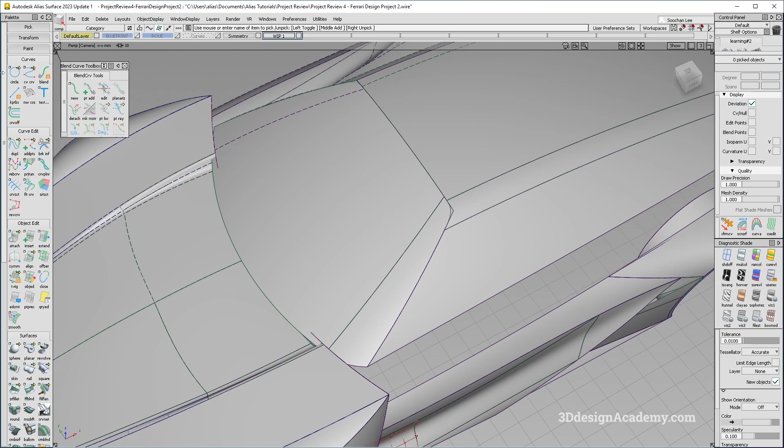In this lesson, we will continue with part 2 of the Ferrari design project review. So in the previous lesson, I spent some time fixing up the upper, so I think I'm going to go ahead and move on to different areas of the car, especially the body side and the front fender.

So before I do anything though, let me just go ahead and turn the symmetry off over here, and I'm also going to just trim this out just because it's bothering me over here. So let's go ahead and do that. I'm just going to project over here like this, and trim it like that. And since I'm done with it, I'm just going to go ahead and delete the construction history over here.

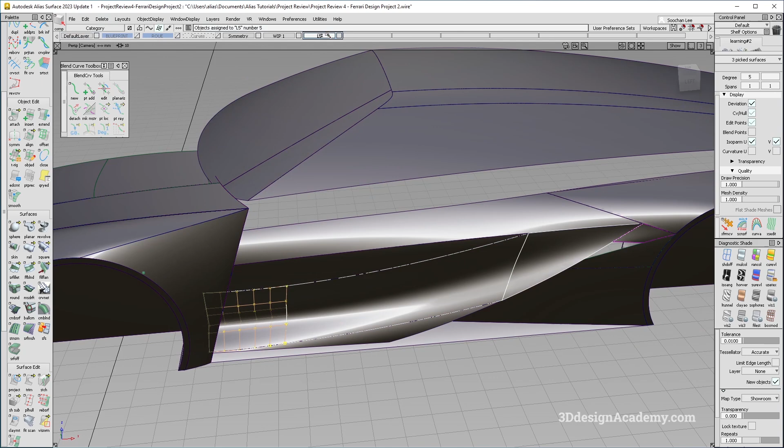And let's look at this fillet over here. So I did turn on the CV structure. Now the highlight in the structure is actually not too bad. However, the CV structure can use a little bit of improvement. As you can see over here, it's going like this. So first of all, I'm going to delete the construction history over here, and I'm just going to go ahead and hide this. So I'm just going to say hide, and let's look at the underlying structure.

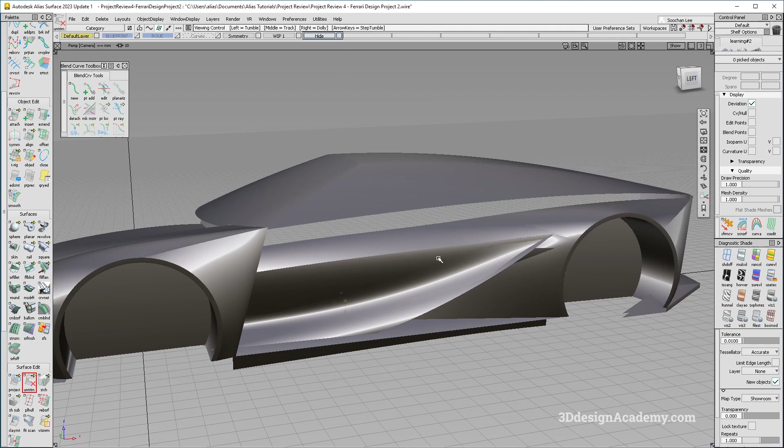So I'm just going to go ahead and trim over here, and trim this one. Actually, the theoretical looks pretty good. Now, if the theoretical is good, the surface created for that is also going to be good. As you can see over here, the theoretical line flows nicely. Even though the CV structure of the fillet is not exactly ideal, I think it's actually doing pretty well. All right, let's go ahead and fix it up a little bit so that the surface or the fillet itself is a little bit better.

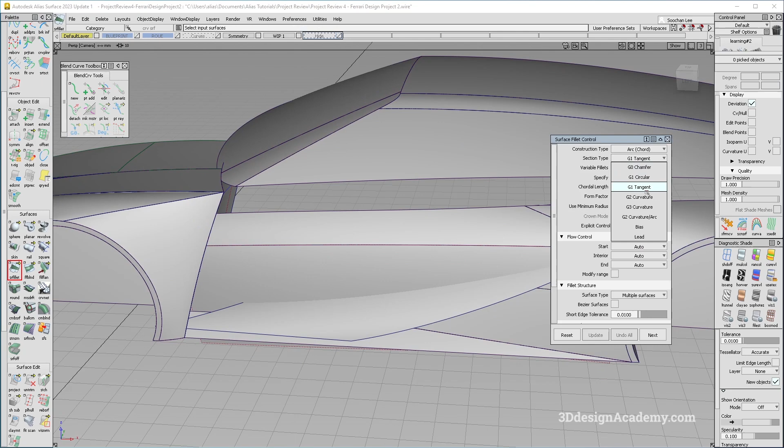So I'm just going to delete all the COSs that were previously there. And I'm just going to go ahead and do a surface fillet. It's going to chord, it's going to G2. I can't quite remember what size this was. Now this is actually really small. It would have been nice if the model was made in full size, because right now this is, I think, probably like 1/10 of what it's supposed to be, but that's okay.

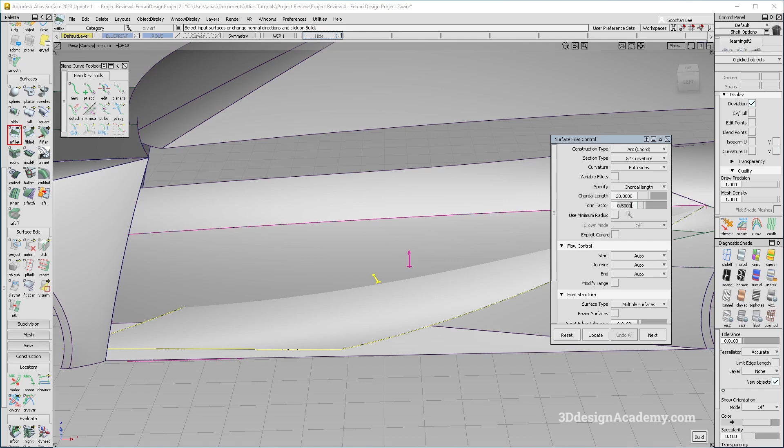Alright, so it looks like it's about 20 mils there, so let me just go ahead and hide those, and I'm just going to grab a surface fillet over here, and let's do 20, and see how that does. I'm just going to make sure that the direction of the fillet is good, auto is good. Now, that said, it looks like even with the surface fillet, it does have a little bit of a structure issue. It's not horrible, it's a little bit better than before, but it's not exactly great.

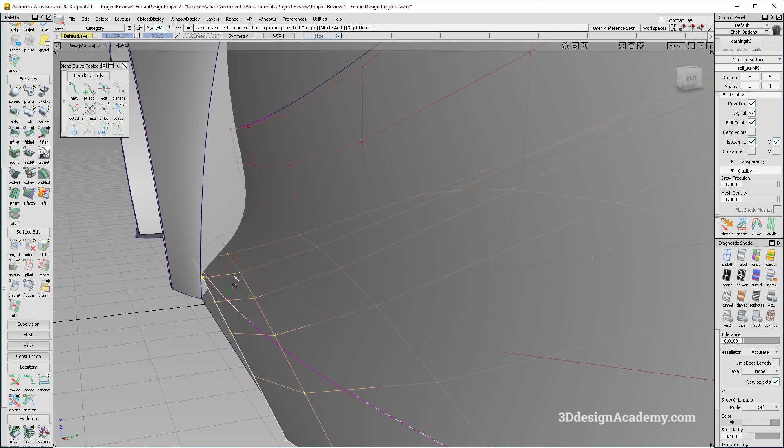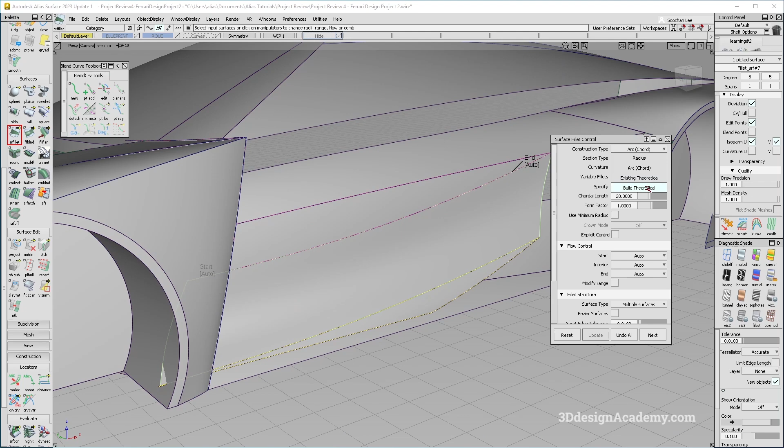Now, one of the reasons why this is doing that is because, as you can see over here, this surface has a lot of curvature. So let me just undo this. As you can see, it's got a lot of volume. So that's automatically going to curl the surface inboard quite a bit. All right. Now, let me see if I can create it using other options. Instead of using G2 chord, I'm going to see if I can just do a build theoretical and see if that makes it any better.

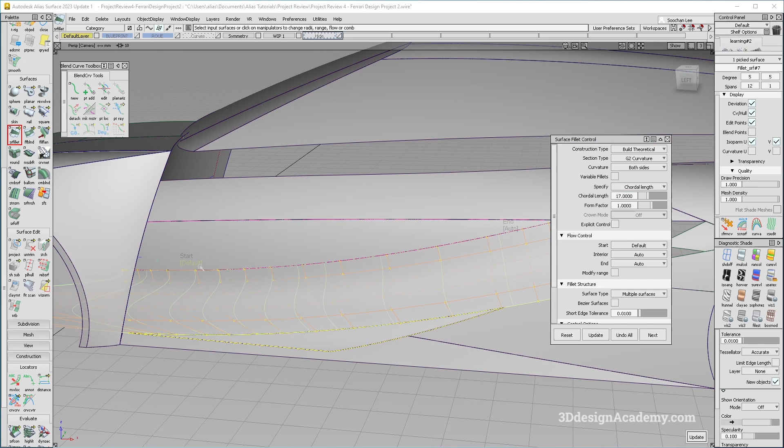I think the CV structure on this one is a little bit better. However, because it is actually going over, you probably want to reduce the size a little bit. So let's go ahead and do that. I'm just going to make it maybe 17. I probably want to retain a little bit of the surface under there, so I'm just going to say default over here for now, like this, and let's leave that to auto.

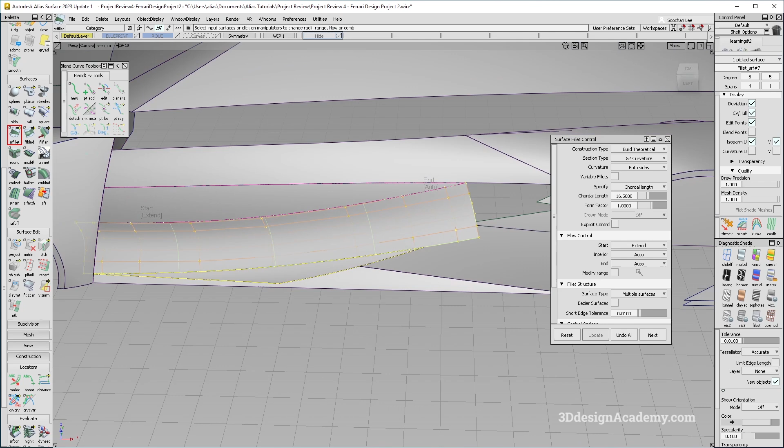Okay, so it looks like it's missing a little bit, so I'm just going to say extend, and I'm just going to reduce it by one more, so let's do 16 like this, maybe a little bit more, 16.5. Okay, so that's a little bit better. As you can see, it's a multi-span surface. So I'm going to see if I can just do a Bezier.

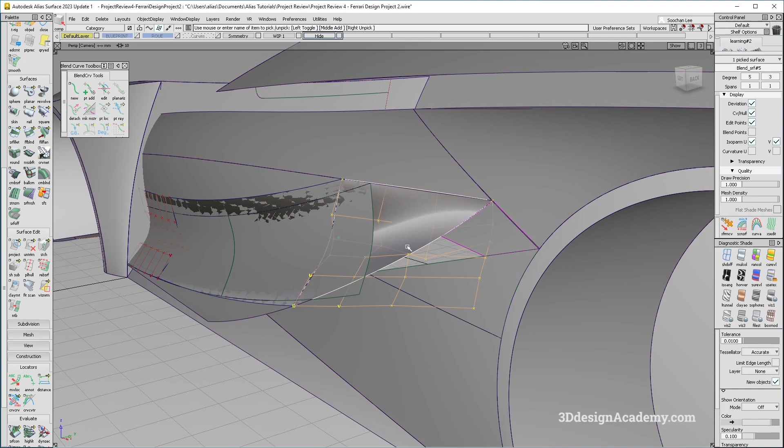Bezier, it's not bad, but it's not exactly great. Now, the creator of this model did have a surface going all the way through. Actually, let me just see this. Now, if you have a surface like this, you don't want to terminate it like this over here, because the surface CV structure is a little bit weird. So I'm going to show you guys how to patch this in.

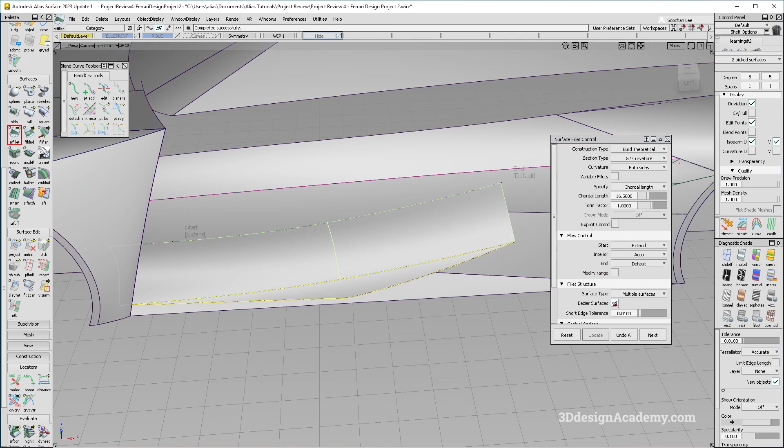Now, instead of having a multi-span surface, I'm going to see if I can just turn Bezier off and do default, and well, still multi-span surface, so let's try to reduce that. Actually, you know what? Let's do Bezier on this one. Still splits into two, which is kind of annoying, but that's okay. All right, so I'm going to try and clean this up. So I'm just going to use align over here like this. Oh, maybe I shouldn't have done that, but that's okay.

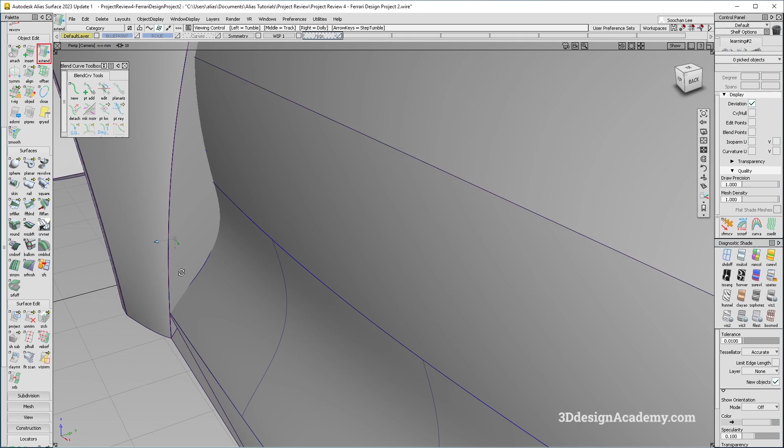Sorry. Okay, so first thing I'm going to do is stretch this back over here because technically this part is blocked in, so you don't really need surface all the way there. So if your footprint is limited from here to here, that is going to allow you to reduce the number of spans. So I'm just going to go ahead and align this one. Position influence, I'm going to crank it up to max. I'm just going to leave it like that.

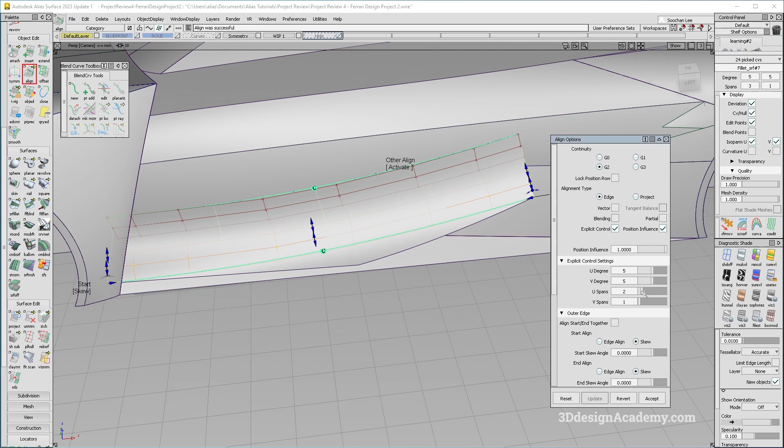I'm going to do the same thing over here. And looks like the CV structure is following somewhat nicely. And I'm just going to reduce the spans like this. And as you can see, I was able to achieve curvature with a single span. Now this one over here, I am going to say partial because I don't want the CV structure to go all the way through there, which is going to be a little bit weird. Yeah, that's actually not too bad.

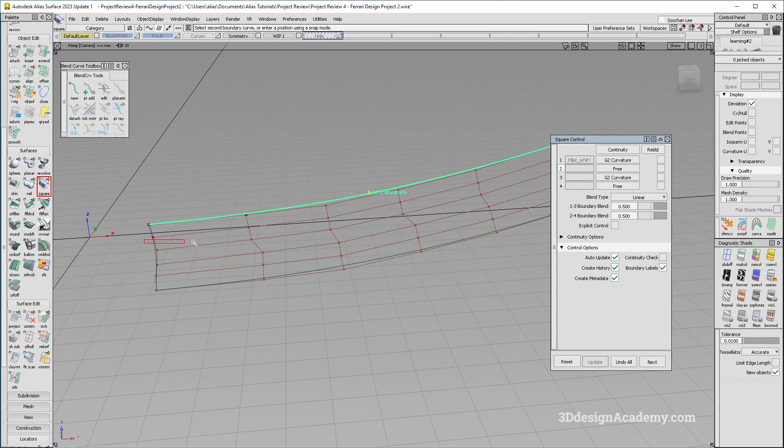Right now you'll see that there's a zigzag, so I'm just going to clean that up using square. So I'm going to grab square: 1 is going to be curvature, 3 is going to be curvature, and I'm going to pick the exact same surface in order to clean that up. And as you can see, that gives me a nice CV structure, which is much better than before.

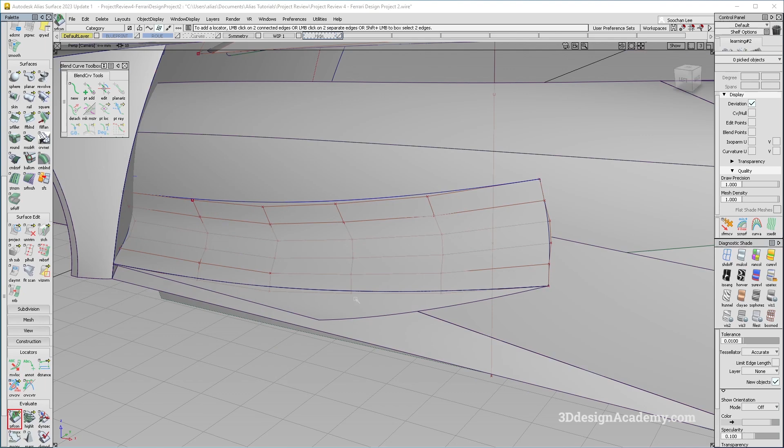And because I'm aligning curvature to the existing fillet, it's going to achieve curvature onto the surface that it was connecting to. So if I grab surface continuity over here, it's still curvature here and still curvature here. Okay, so now comes the question of how do I block this in? So I'm just going to untrim this piece over here, and I'm going to go ahead and do this.

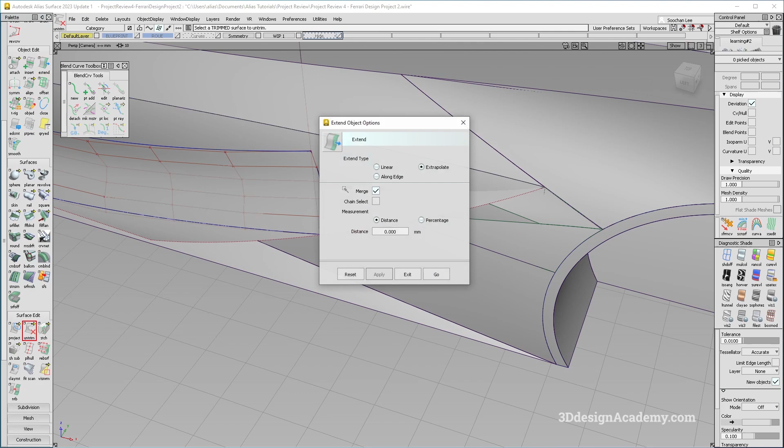Now, when you're tackling an area like this, there are a couple of options. If you want to reduce the patch count, you can probably just extend this over here and have this patched in like this. However, because this is ending in a triangle, you can try to patch this in one go. I guess the most natural patch of surface is just to have something like this and trim both ends. But if you have a design edge that you want to retain as much as possible, I'll show you how to do that.

Okay. So I'm just going to extend this COS over here like this. And as you can see, we got 4 edges: 1, 2, 3, and 4. So now you can use a square to fill that in. So 1 over here, 2 over here, 3 here, and 4 here. Now, right now my continuity is a little bit off, so I'm just going to turn that off.

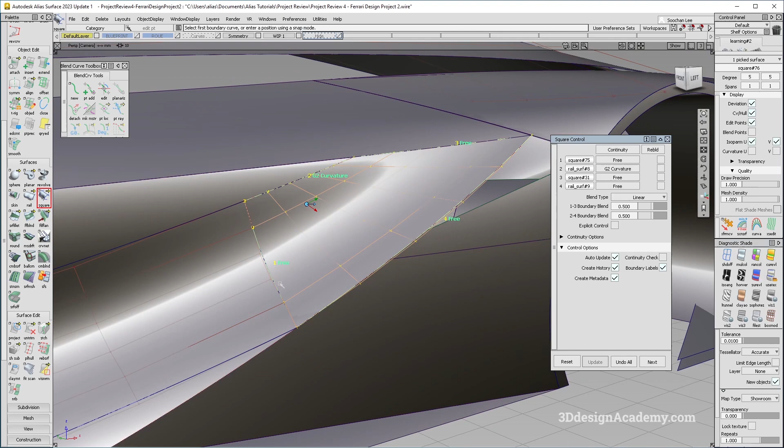And I'm going to set it to curvature, because it does have to be smooth since it's essentially a continuation of the fillet. And this side has to be curvature too. So 1 is going to be curvature, but it's got a lot of spans. So I'm going to turn on explicit control, and it's going to be 5 and 5. Okay, let's take a look at this. I'm just going to do 1 over here, and it does look like a pretty decent effect over here.

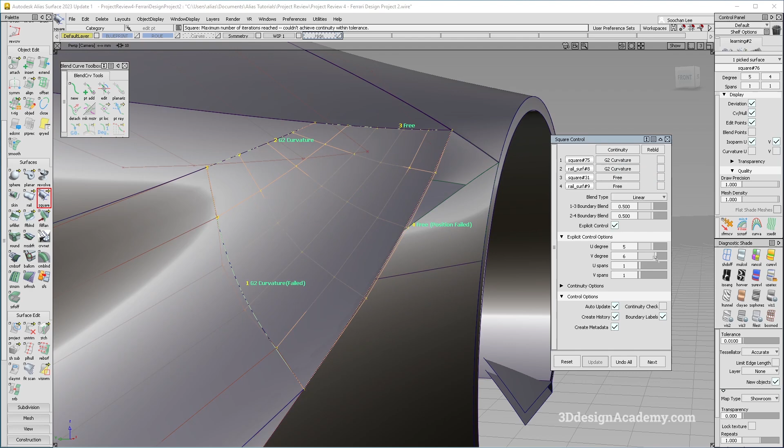So what I'm going to do is I'm going to reduce the number of CVs over here. And the reason why I'm doing that is because this is a position row, this is a tangent row, and this is a curvature row, which means that these rows of CVs are affected by the continuity over here. Same thing over here. This one is position, tangent, and curvature.

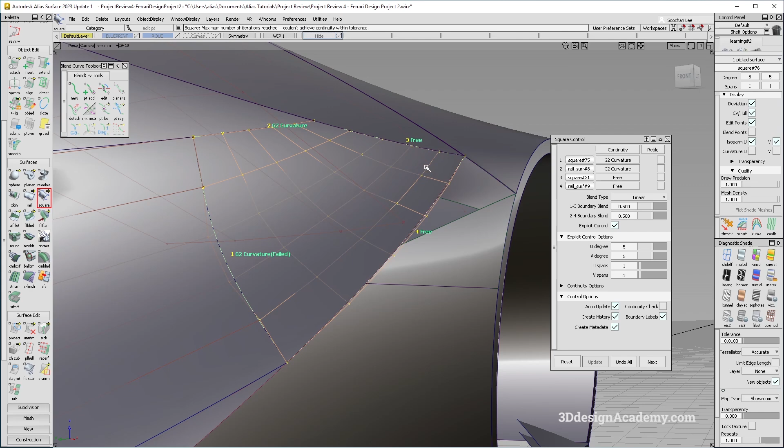Now, if you look at these 4 CVs, they absolutely have no effect on any of the surfaces, which means that they're just free floating. So you have to control them also, because as you can see over here, it's doing a little dip over here. If I were to just turn this off, it's nice and natural. But if I were to do curvature on this one, you'll see that this goes up a little bit. So now, the highlight is actually pretty decent, so you can probably leave it like that.

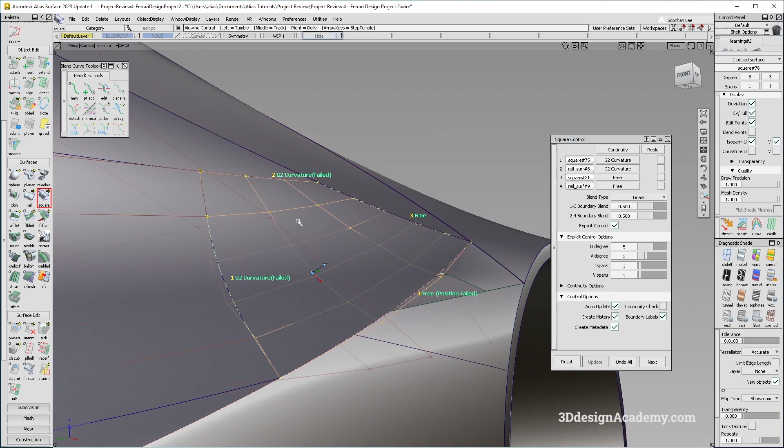But if you wanted a little bit more CV control, here's what I suggest. If you want to leave it at degree 5, I do suggest playing around with the boundary blend, depending on which side. Well, it doesn't look like it's doing much. One other thing you can do is you can also reduce the number of degrees like this. And what this does is it limits the number of CVs that are free floating. As you can see, there is no CVs that's not affected by some kind of continuity.

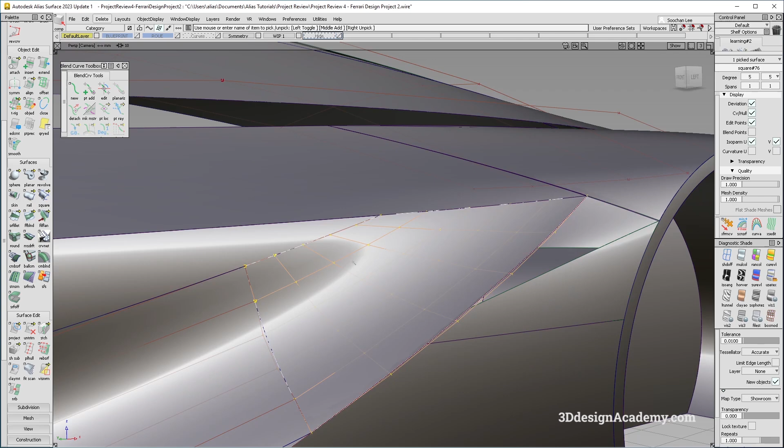The only problem is, of course, because it is degree 3, it's failing position here, failing curvature here, and failing curvature here. Now, if this was the case, what you can do is just leave it like this and delete the construction history and crank it back up to degree 5. And what that does is it actually has a really nice linear CV structure flowing all the way through and refit all the continuity after the fact.

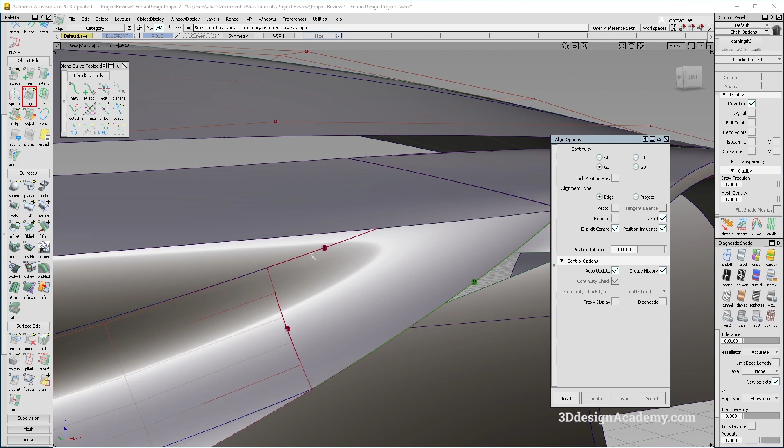So right now it looks like it's failing. Oh, actually that's tangent. So it looks like it's failing tangency over here. It's probably failing position over here. So let's go ahead and fix that. So first of all, I'm just going to fix position over here like that. Looks like not a lot of CV movement, which is good. And let's go ahead and make sure that this is curvature like that. That's good. And I'm going to go ahead and see if I can get curvature here.

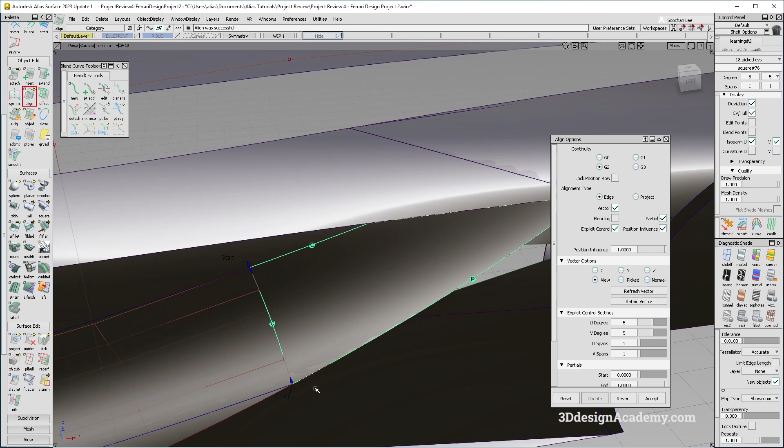Now this one is going to be a little bit difficult. So let's see. Now, of course, if I do edge, it's going to go like this, which means it's failing position here and failing position here. Although I'm not sure why it's failing position here, but that's okay. So what I'm going to do is instead, I'm going to use the vector like this. Oh, and what do you know? I got curvature on both sides. And that's wonderful.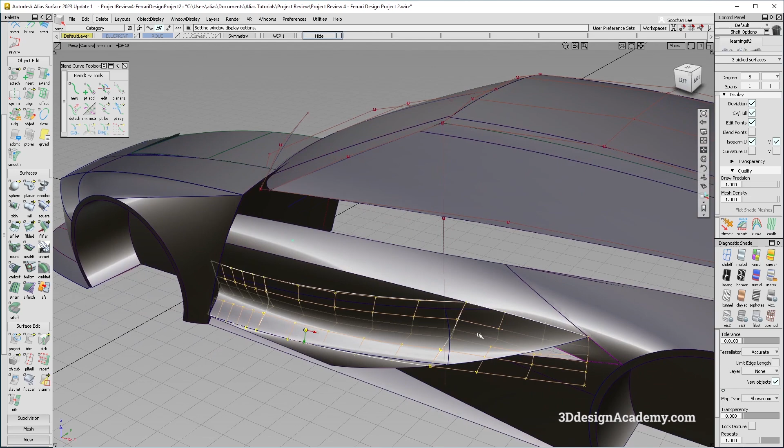All right, so I'm going to go ahead and delete the construction history over here, much cleaner than before. So let's just go ahead and trim this one over here. Oh, actually, I believe this is already trimmed. Okay, so if you look at the before, not only did I reduce the patch count, the CV structure is a lot better, and I don't have a weird twisting surface over here. So let me just go take a look at this. It's much more controlled. It retains the edge, highlights very nicely, and that's how you improve the body side. Okay, so now that's done.

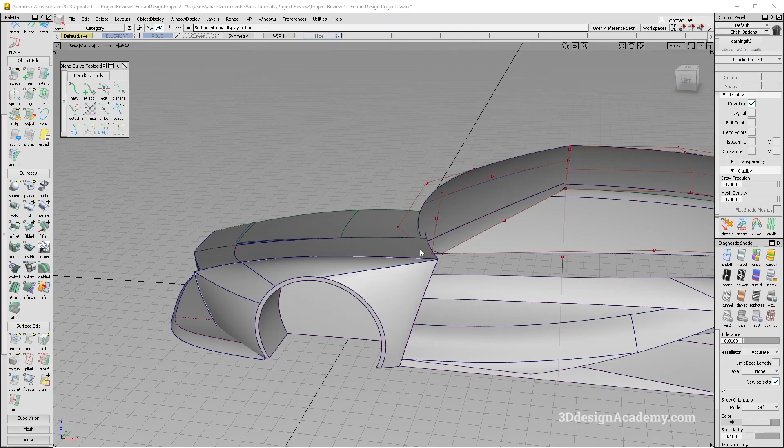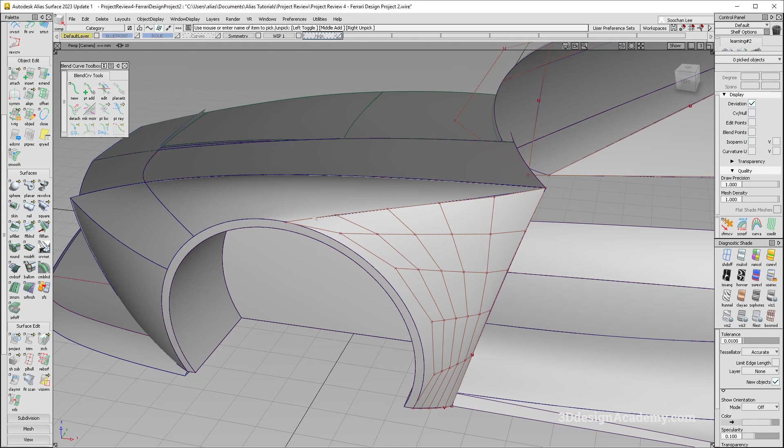Now, one of the things that you probably want to do is if you have a fender piece like this, you probably don't want to have a sharp edge like this. That usually creates a little bit of CV structure problem, and it's not exactly the best when you're trying to fillet it. So unless you have a specific design line that's going like this, I suggest trying to open it up a little bit. So let me go ahead and do that. Now, another thing I'm going to do is if you look at the CV structure over here, you'll see that there's a little bit of volume here. So it's creating a little bit of bump on the CV structure.

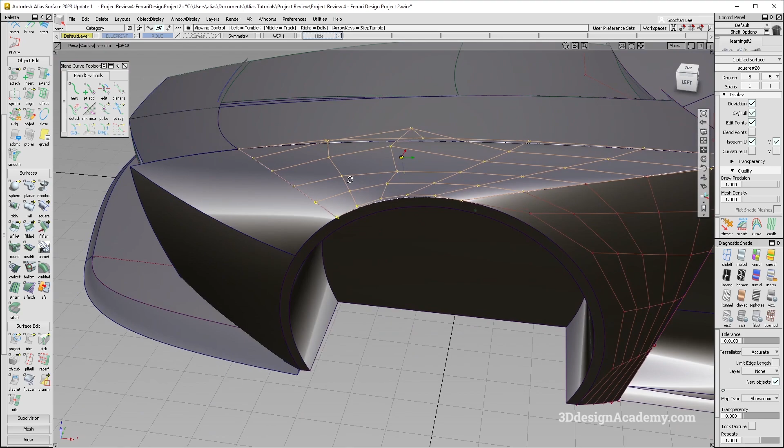Now, highlight's not bad, but when it comes to surfacing, this is probably not the best practice. So I'm going to fix it a little bit. But before I do that, I don't see any reason why this is divided into two pieces. I think the reason is because the creator of this model tried to curvature align on this side, which is fine. But I believe I can do a little bit better and just make it out of one.

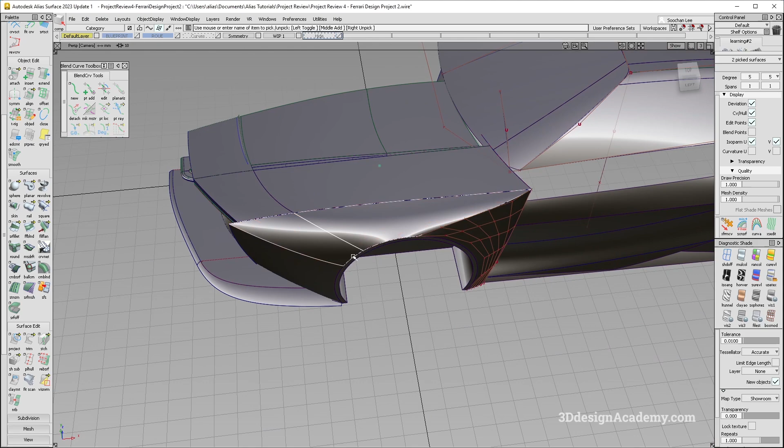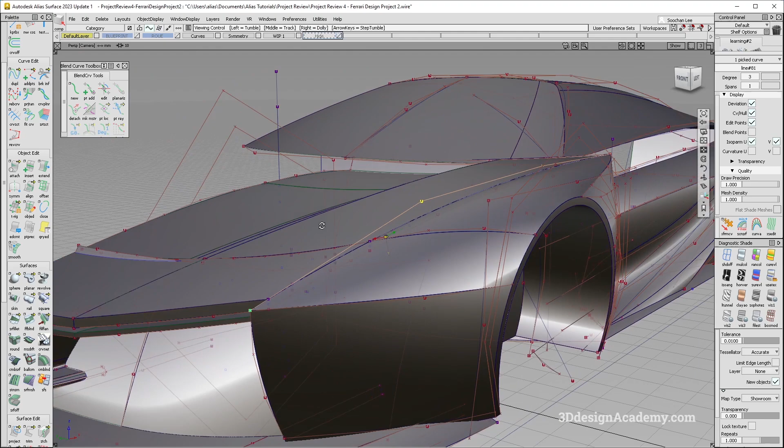So let's do this. I'm just going to snap a curve over here, or actually duplicate it. Let's see, I don't know why there's a, oh, there we go. Actually, if there's one surface there, I don't know why. Okay, so you know what? I'm just going to dig through the curves. So he did have one curve. Yeah, so why don't we just use that?

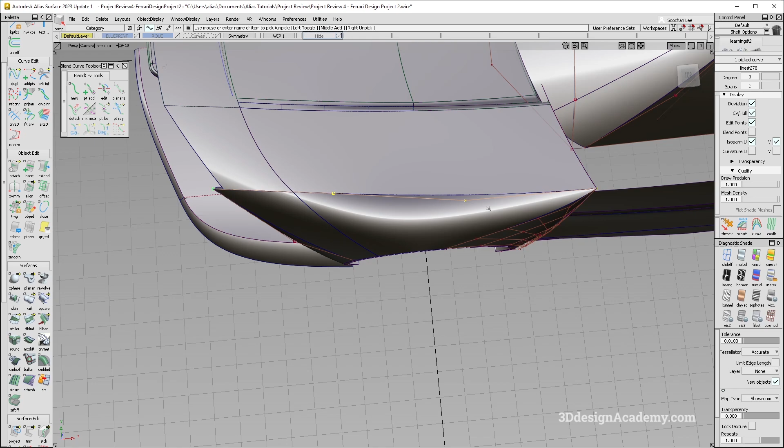Okay, so I'm just going to copy and paste and bring it over to the default layer, hide everything else. So if you have one curve, I suggest you use it. Now, I would say this is probably not best practice. So what I'm going to do is I'm just going to make it degree 2. Now, there is going to be a little bit of discrepancy. I say that's totally fine too.

Okay, so I'm just going to hide these over here. And actually, I'm going to hide this one also. But before I do that, let me just get a curve. Let's see, degree 3, yep. And I'm just going to put it over here. I'm just going to duplicate this one over here. You know what? Actually, let's make it degree 2 like this. I think that's good. And of course, I do need a volume here, but let's see. I'm going to just use a birail first and see how that does.

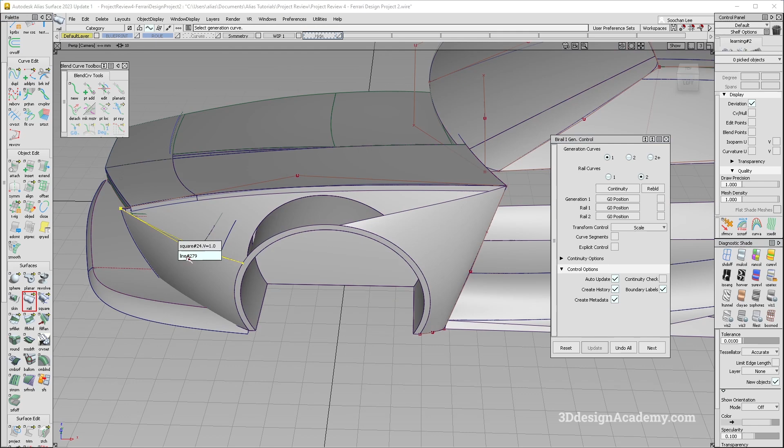Okay, so it's going to be 1, 2, and 3 over here. And I really don't know why, but Autodesk really has to fix this. You'll see that the surface just ends over here, and you have to click rebuild so that it goes all the way through. It's not kind of annoying, it's actually really annoying.

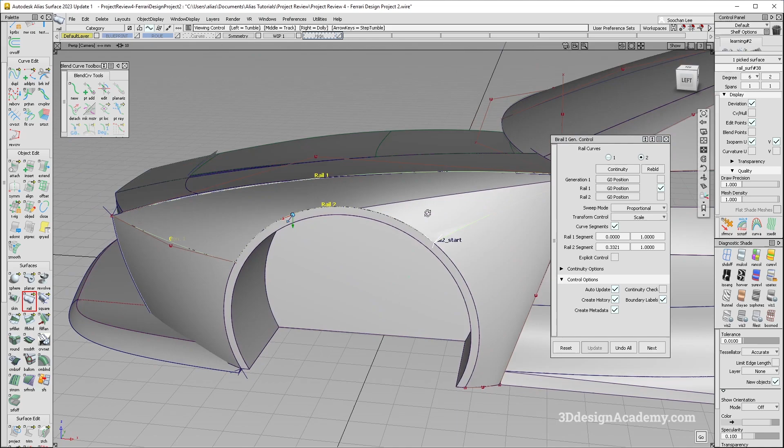Alright, so I'm just going to turn curve segments on like this, and I'm just going to put it over here. Right away, actually the CV structure is not that great. To be honest, I don't know why it's doing this, because I feel like it should be a lot more consistent, but that's okay. I'll try to fix that. But as you can see, actually, I do think it's a little bit too flat. That probably is what the design calls for, but let's take a look at the picture.

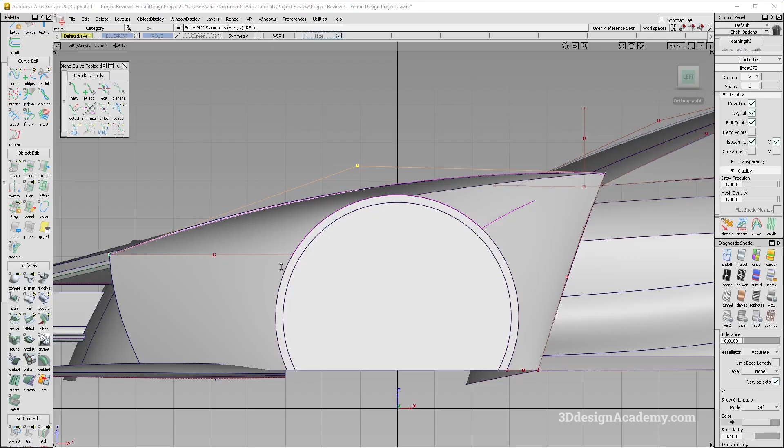As you can see over here, I know that the rear 3/4 view and the side view make it really slim, but if you look at the front 3/4 view, it's actually rising up a little bit, which is probably the volume that the designer of this original sketch intended. So if that was the case, I would actually raise it up a little bit. I don't think it's going to detract from the design and the model. So I'm just going to do that and give it a little volume. And while the CV structure is still a little bit wonky, I do think that the volume over here is actually not too bad.

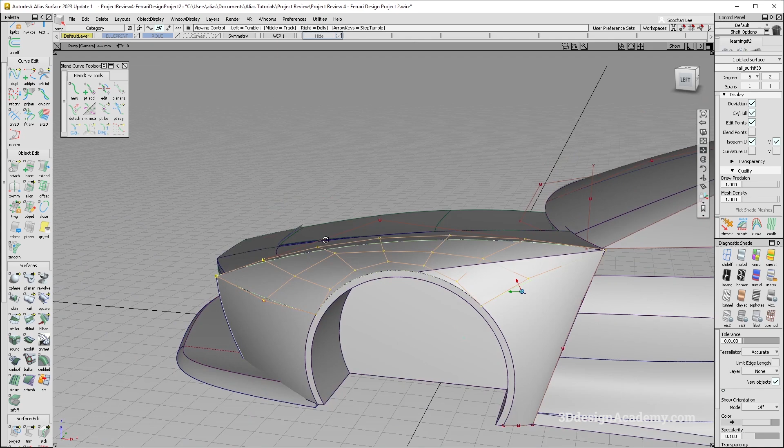So what I'm going to do is I'm just going to duplicate this edge over here, like this. I'm going to get rid of this one. And let's just rebuild it using a square. So it's going to be 1, 2, 3, and 4, like this. And of course, I do want this to be degree 5. This one, on the other hand, I think I can reduce it.

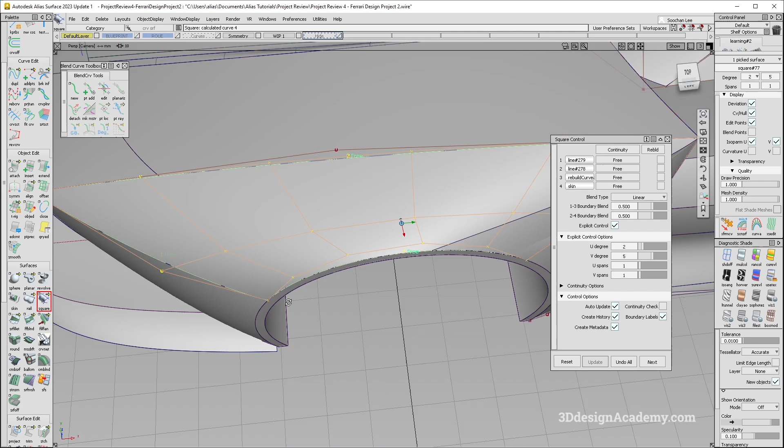Now, this one, I don't know if it's because it's a square, but it looks like it's a little bit biased towards the outboard side. So what you can probably do is just use the boundary blend. Maybe not. That's really weird. Well, if that's the case, you can always slide it over here. So let me just slide this CV over here. Actually, let's take a look at the volume as well. So I'm just going to bring this one over here.

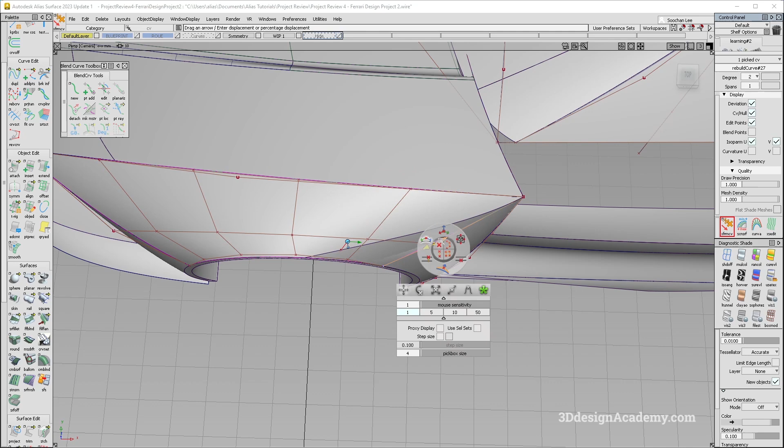Slide it onto this side, and I'm going to slide this onto this side like this so that the CV structure is a little bit more even. Now this does mean you have to realign all of these, but as you can see, you get a more balanced CV structure, which you probably want to achieve when you're modeling.

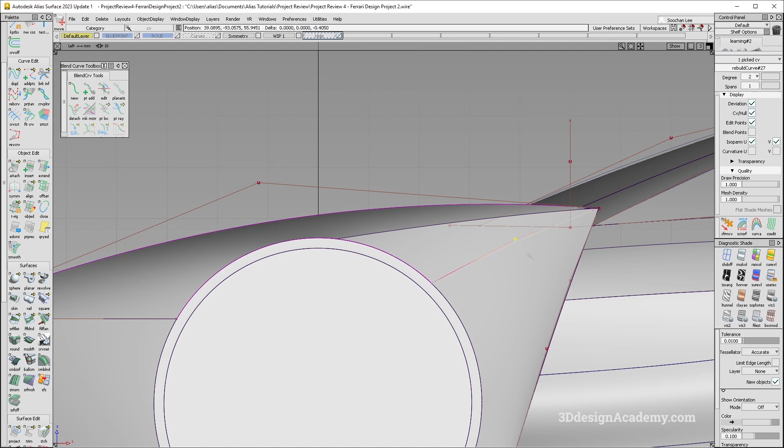Okay, now I'm just going to zoom in over here. Let me just turn this off, and I'm just going to bring it down. Oops. Let's grab the CV like this. Actually, that brought down the volume quite a bit, so maybe that's not the best. Okay, well, let me just go ahead and hide it. You know what? Let's just retain it like this.

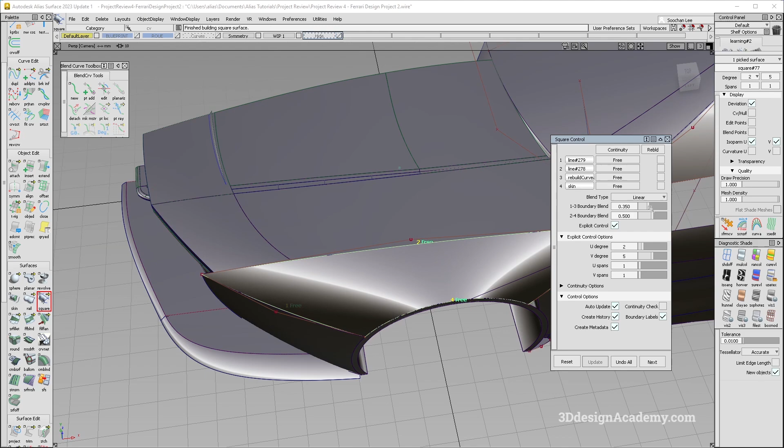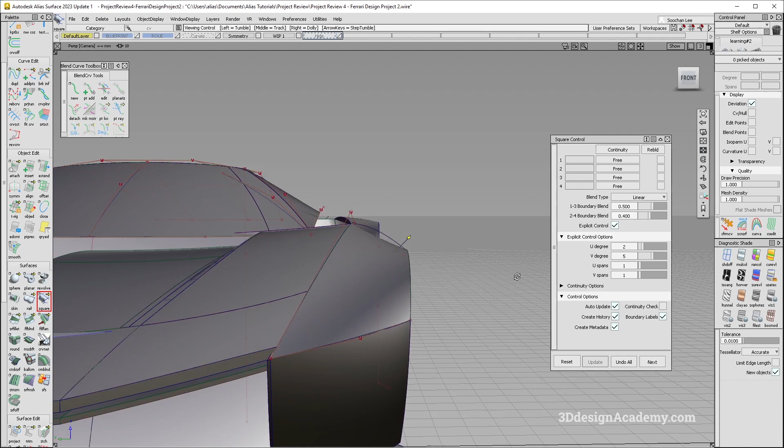However, if you want a straight edge, what you can do is you can just bring it down like that and use a boundary blend. Let's actually turn up the CV structure. Or you can just manually increase the volume. Maybe something like that. Now it does turn into degree 5, which is fine. I don't know why Square automatically does that, even with the explicit control, but it does what it does. So yeah, I think that's much better. I think having a little volume towards the inboard side is good.

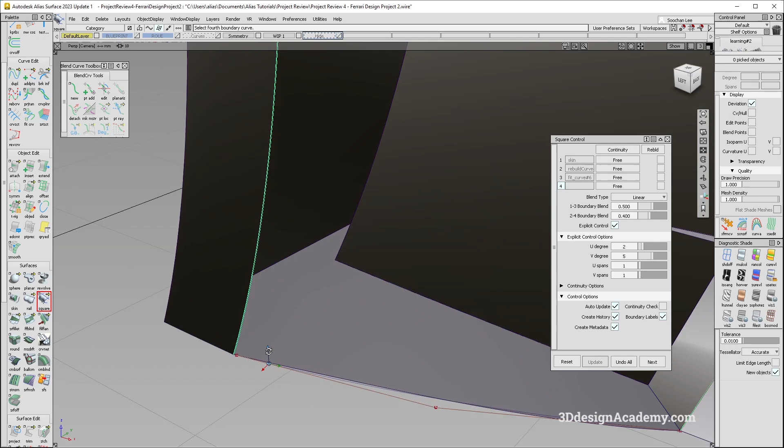So now let's go ahead and fill this in. I'm just going to hide this piece over here, and let's just use a square. So it's going to be 1, 2, 3, and 4. Looks like our edge is missing somewhere. Oh, looks like that's it. So I'm just going to use a stretch tool to snap it over here.

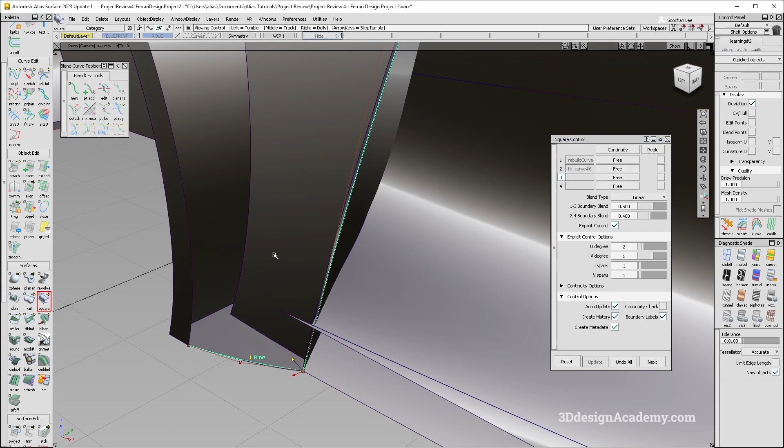And do that again. So 1, 2, 3, and 4. Oh, is it missing over here too? Yes, it is. Okay, stretch here. Hopefully this time it'll work. So 1, 2, 3, and 4, like this. This time I am going to reset the boundary blend. And this one, let's turn the explicit control. Oh, okay, so it looks like I do need an explicit control. Degree 4 there. I think that's good. Try to clean up as much as possible.

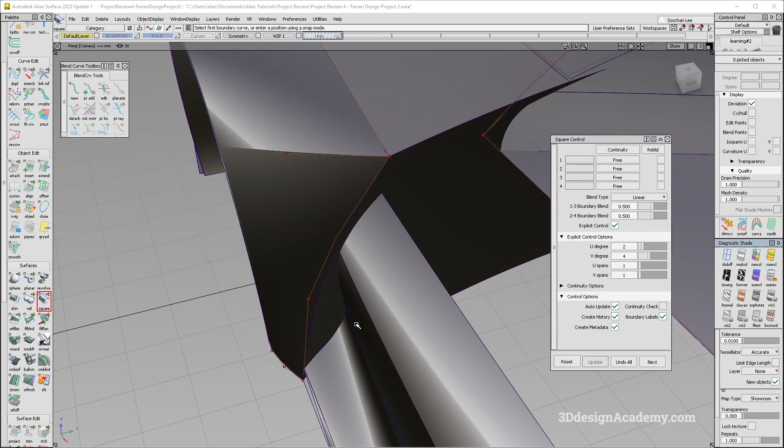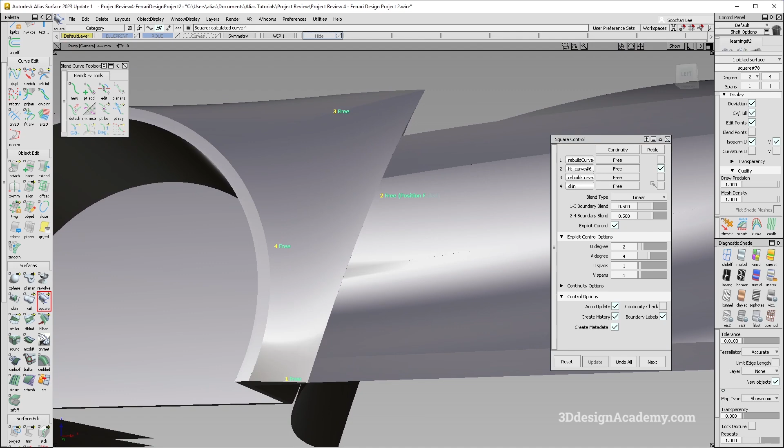And let's just look at the volume of the piece over here. That looks pretty good, but there's a little bit negative here. I think that's probably due to the CV direction over here. So if you were to do a rebuild over here, that negative should subside a little bit. Well, yes and no. I guess it's really up to you if you want to keep it that way, or if you want to just do a rebuild like this. Having a CV structure like this versus this one, where it's creating a little bit sharper angle, probably helps. However, I am also going to reduce this to degree 2, just to keep it simple.

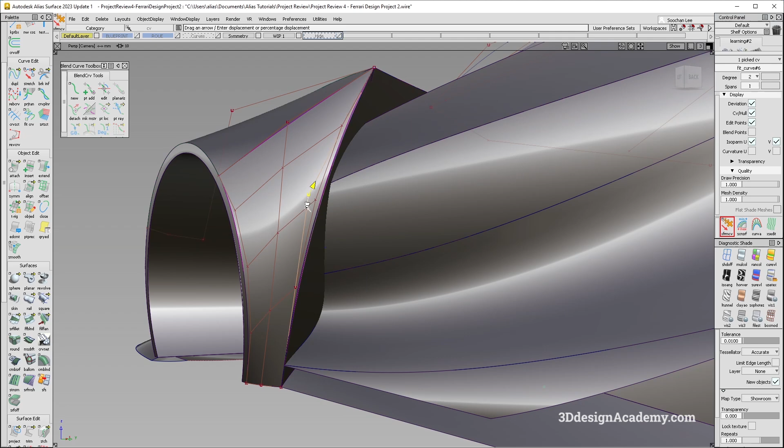However, it looks like after reducing to degree 2, it's a little bit biased towards the top. So I'm just going to balance it by bringing it down a little bit, like that, and that's going to create a more even CV structure. Now that does mean you do have to do a rebuild, but that's part of Alias. So yeah, that's not too bad.

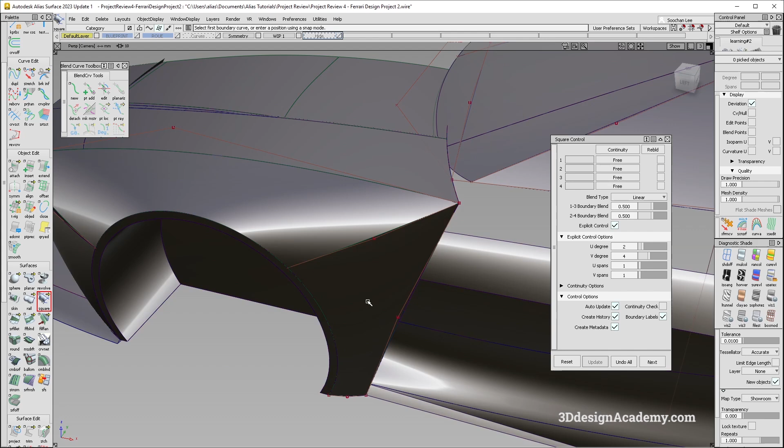Okay, so now let's go ahead and actually connect the two. Now I do think reducing the volume over here is going to help, but let's put a fillet there and see how it does. I do think that it's got a little bit too much peak over here. Let's see what happens if I put a fillet there. Okay, so for this one, I'm going to use build theoretical. And the reason why I do that is, well, let's give it a go first.

So if I were to do 10, as you can see, these two surfaces are merging towards, not exactly flat, but a single edge, which means that this one is actually becoming curvature as it approaches this one. So if you just do a regular fillet with chord, you'll see that it doesn't really recognize it that well and just does what it does over here.

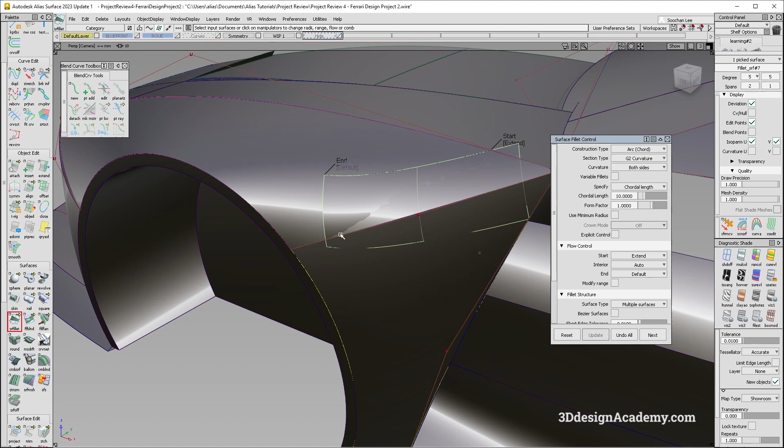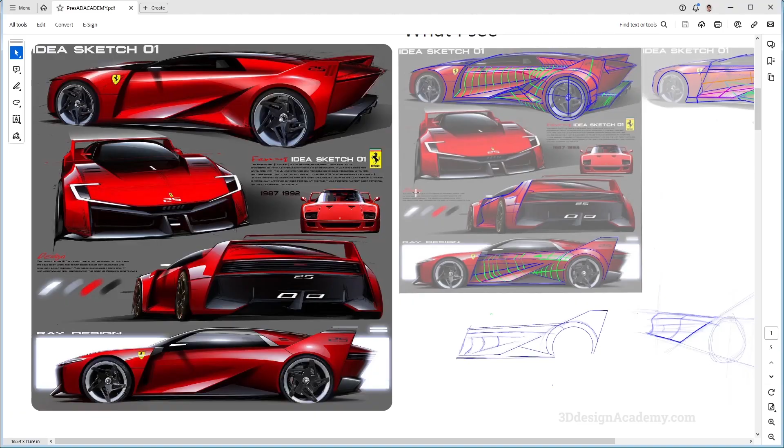So in this case, you want to set it instead to either existing theoretical or build theoretical. But since I already have a theoretical here, I'm going to use existing theoretical like this. And as you can see, it gives me a much better result. And now I'm just going to say edge align over here. Okay, so here comes the dilemma. If you look at the edge over here, in order to finish this kind of a condition, there are two options.

You can either patch it with a square and retain the edge, or you can just extend it and trim it out. Or of course you can do an edge align, which actually I would prefer to do.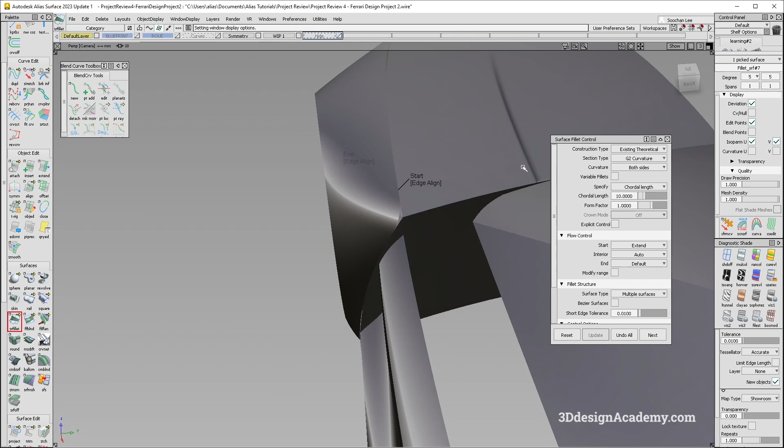But that does mean you would have to do something over here. Now, in order to retain the design as much as possible, let's do this. First, I'm going to make the fillet a little bit bigger so that it has a smoother transition, and I'm just going to retain the edge over here. So I'm going to say default, and I'm just going to patch this in.

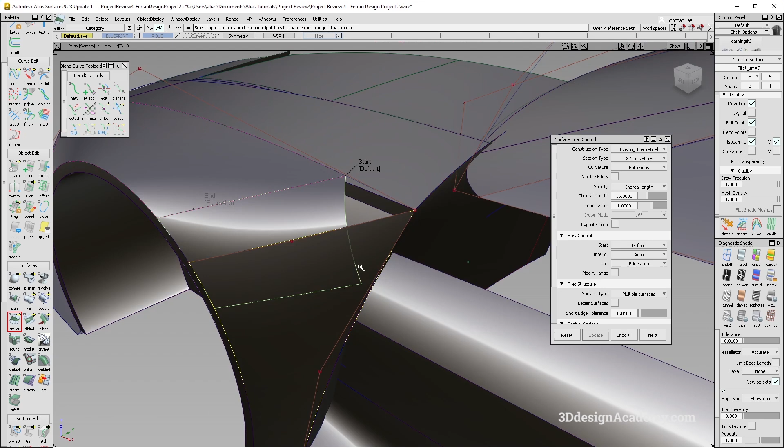Now, if you patch this in, the surface, especially if you have a big difference between the angle of this one, and it's creating quite a strong peak over here, it is going to do a little bit of flick towards the end, or a little bit of potato chipping, but I'll show you that in a little bit.

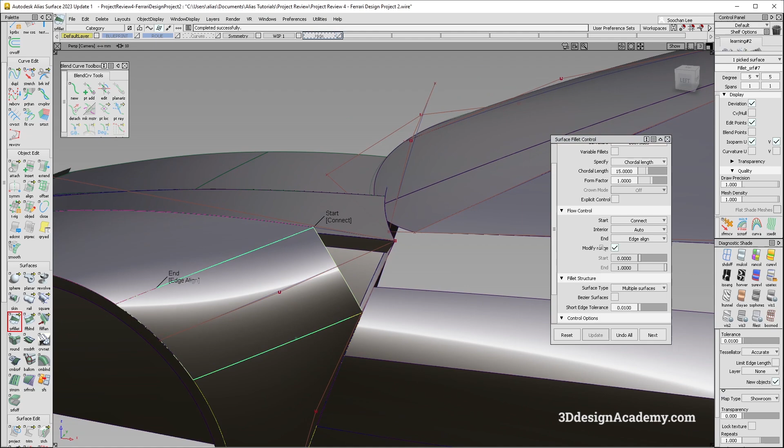All right, that's it. However, I think I would actually prefer connect ends, just because this edge is a little bit too small. So what I'm going to do is I'm going to say connect, modify range. Where is the manipulator?

It's supposed to pop out, but looks like it's not. But that's okay, it's not the end of the world. Well, there are two options. You can either extend it back. The only problem with extending one side is it does have a little bit of effect on the CV structure.

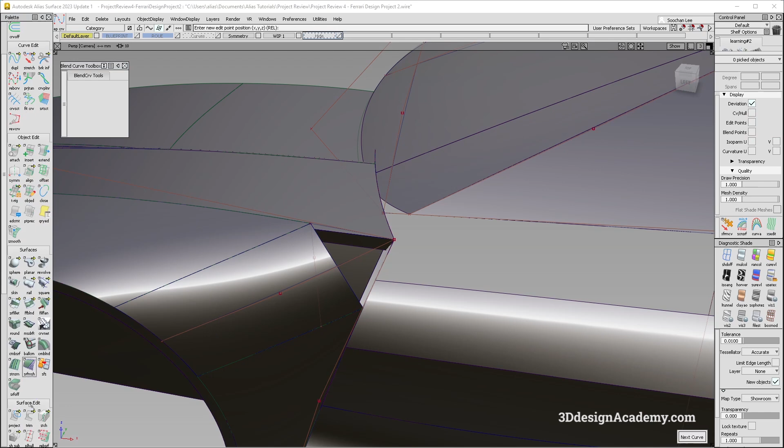So what I actually prefer to do is just do a trim convert. I'm just going to snap a curve here to make this patch a little bit bigger. I'm just going to project like this, and do a trim convert like that.

And of course that creates a little bit better structure. I can just delete that. Now with the trim convert, though, you got to be a little bit careful, because sometimes the curvature continuity gets messed up, so you just want to check. Well, in this case it didn't.

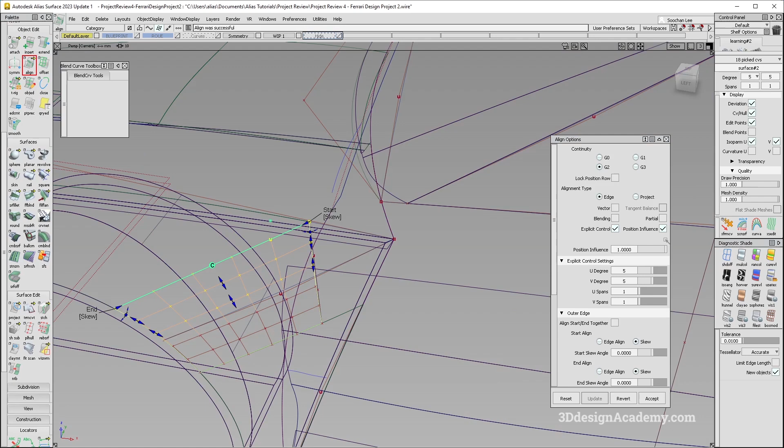However, sometimes you want to make sure that it's actually curvature, so I'm just going to go ahead and align. And well, it looks like there's a little shift. I think I'm just going to leave it as position influence at 1, just so that I don't have to mess with anything else.

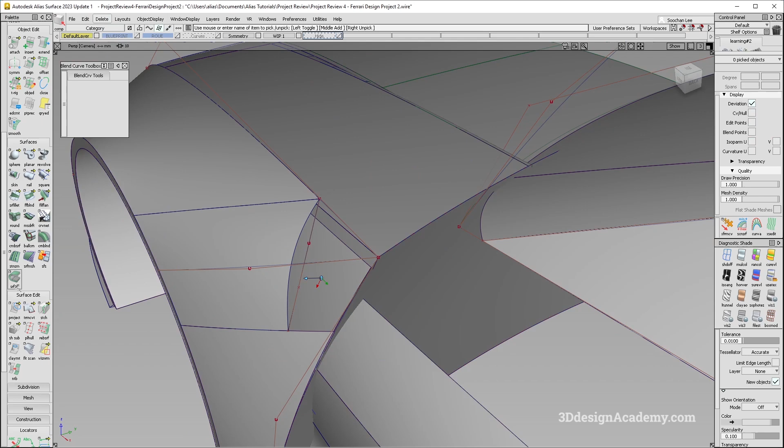All right, so now that's done. I'm just going to go ahead and delete the construction history over here. I'm just going to go ahead and do a square, it's going to be 1, 2, 3, and I'm going to pick the curve over here, 4. Okay, so I'm just going to set it to 5 and 5.

Of course, 1 has to be curvature and 4 has to be curvature. Of course, with this one, you'll see that because I'm trying to make a square and align to existing edges, there's going to be a little flick. And because it's actually 5 degrees, you'll see that these 4 CVs are floating by themselves.

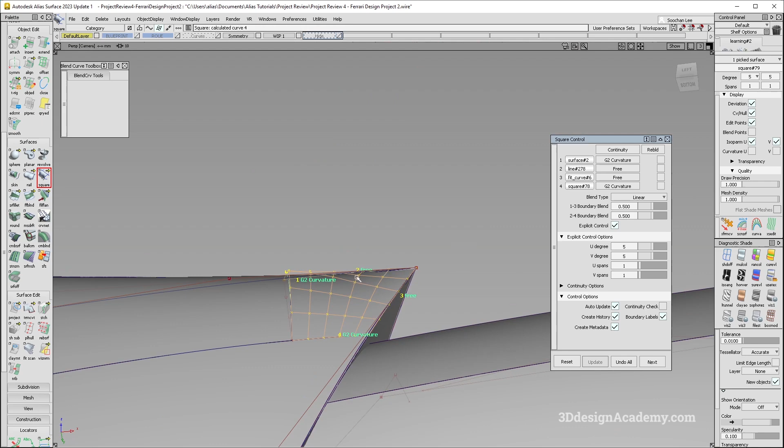Like I said, over here, you want to modify them, control them a little bit. So you can use a boundary blend like this, which is a little bit better. But, well, not really—oh yeah, actually not really. So what I'm going to do is I'm going to see if I can reduce the number of degrees.

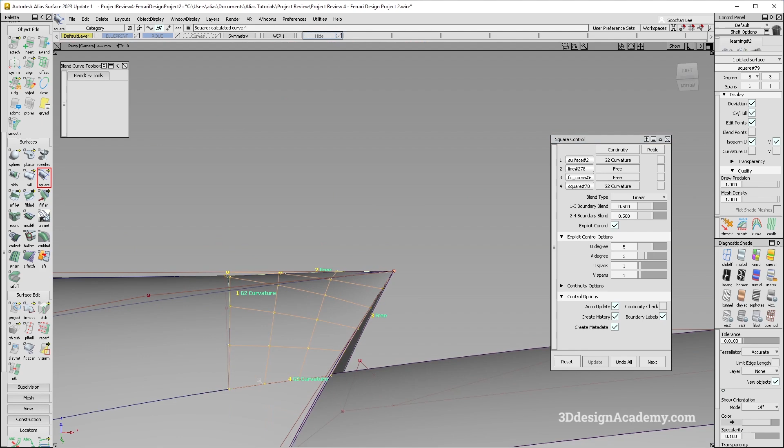Not this one, but this way. Okay, it still retained the curvature, and it still retained curvature here too. So despite my initial worry, this was actually really easy to do. So curvature there.

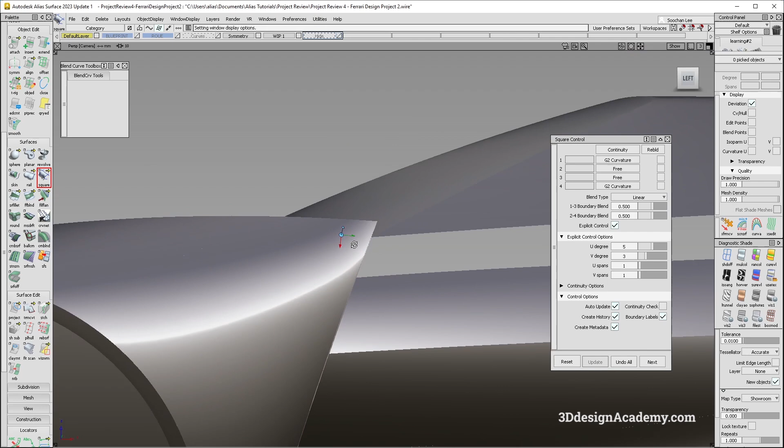And that's perfect. So if you see this one, actually this one is actually not that bad. I'm kind of surprised. So you'll see that it is actually a little bit of potato chipping over here, but that actually looks pretty good. So yeah, I'll take that as a win.

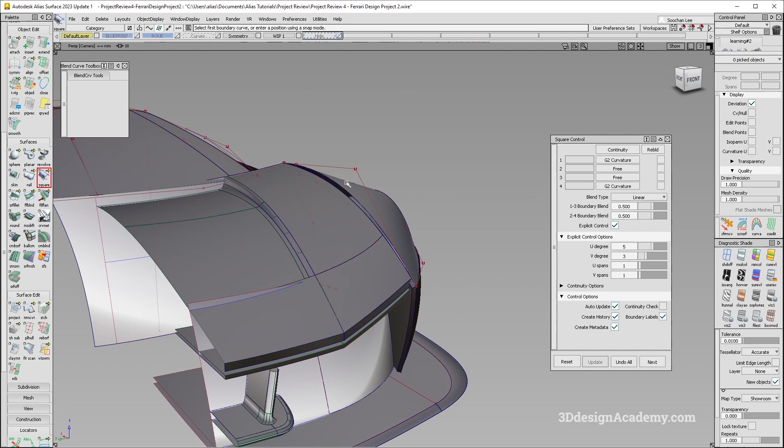All right, so I think I'm going to stop here for part 2. And in the next one, I'm going to show you guys how to remodify this one, and I'll probably do a little bit of modification on this one too. Because of this modification here, there's a gap, which means that all of these surfaces have to be readjusted. So I'm going to show you guys how to do that in part 3.